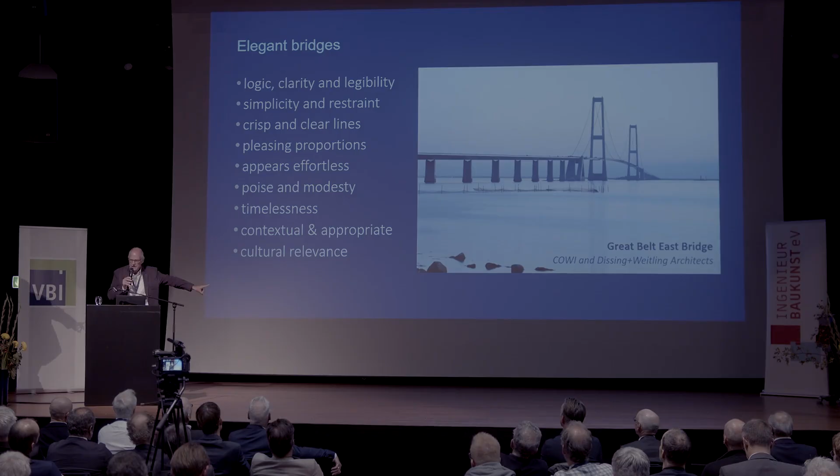Elegant bridges, they're supremely elegant - the Storebelt, Great Belt Eastern Bridge, a fantastic piece of work. These are things we need to keep in mind, but nobody teaches this in most engineering classes. I certainly find it difficult to find engineering schools doing it really well. I try when I teach.

Let me take you back 25 years. In the UK we had a number of Millennium Bridge competitions - this one, the famous one in London, got a reputation for things it didn't really want to have: the wobbly bridge, as you know, which spawned a whole raft of discussions about bridge dynamics, thankfully.

I got an interesting phone call from the chairman of Arup on the day they had to close it because it was wobbling, saying 'help, we need to sort out what was going wrong' - which was a very interesting 18 months of work to fix it.

Also probably equally famous, the Gateshead Millennium Bridge, the 'blinking eye' as it's called, by Gifford - as they were then, now Ramboll and Wilkinson Eyre architects. And perhaps less well known, the York Millennium Bridge. That's just three of them - there were 25 or so built within a few years.

And it was all triggered by this: the Bridge Design Seminar at the Royal Fine Arts Commission in the UK in 1992, which was itself triggered by this man. There was an exhibition in 1992 at the Royal Institute of British Architects in London of Santiago Calatrava's work, and there's no doubt he created a moment in history where we all opened our eyes to new possibilities.

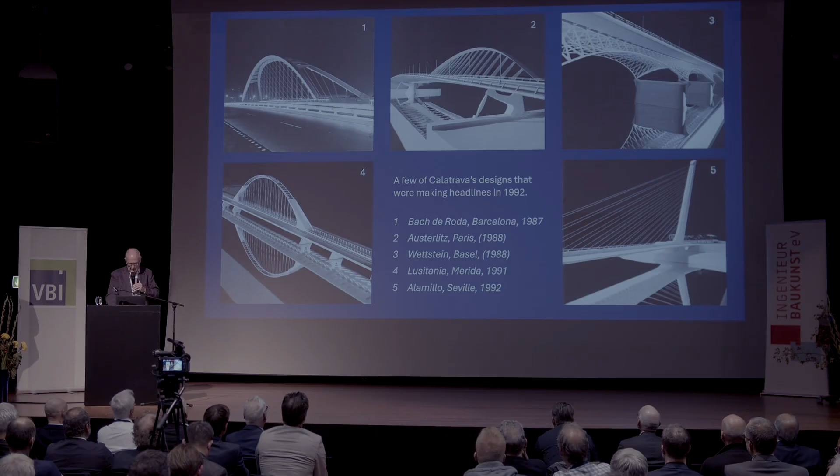At the seminar, Fritz Leonhardt was there, Christian Menn was there, Santiago Calatrava was there, and all the UK bridge designers, including myself for some reason. It was extraordinary to be sitting with these people, because the UK had terrible bridge design going on - nobody was giving the first thought to what bridges looked like, simply engineers building basic bridges.

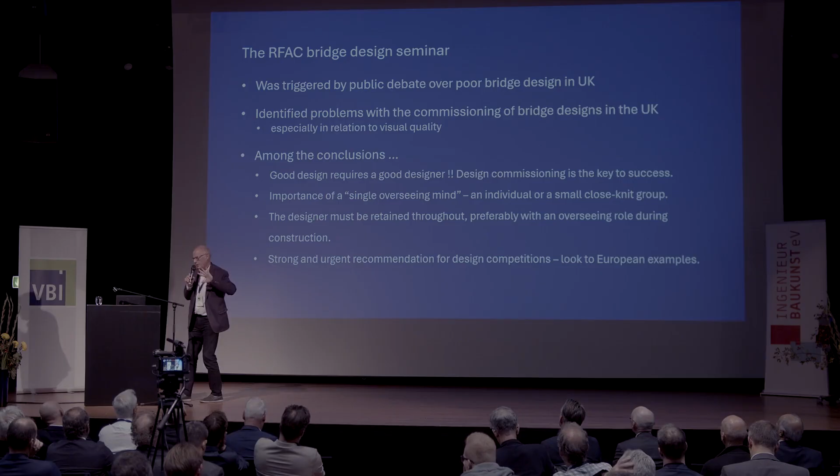There was no imagination going on, very little thought given to elegance and delight. This had become a public debate, a public issue, not just a profession issue. The debate in this seminar quickly focused on the problem of commissioning bridge design, because the way design was commissioned was basically on the lowest fee - fee competition became a thing mainly when Maggie Thatcher came along.

Among the conclusions was, obviously no surprise, good design requires a good designer. So how do you find a good designer? Well, the first thing you don't do is go for the lowest fee. The other conclusion was giving the designer a proper role in the process.

And this idea of a single overseeing mind - the idea that there is a designer, an individual, or a very small team. Because what had happened, and it's still happening sadly, is that design was being done almost by committee, large groups of people.

And the designer should be retained throughout, preferably overseeing construction. Does that still happen?

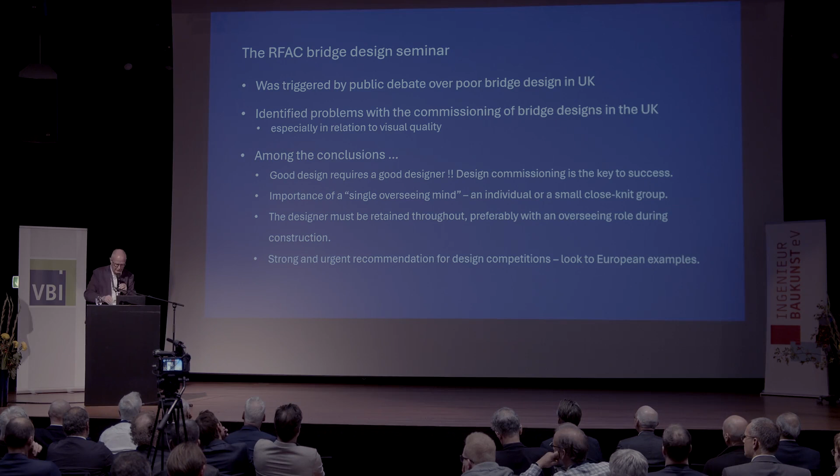There was a big push for competitions, and very quickly there was the Poole Harbour Bridge competition in 1994, which was really, okay, we happened to win it, but it was much more about raising the bar of expectation about what could be done with bridge design.

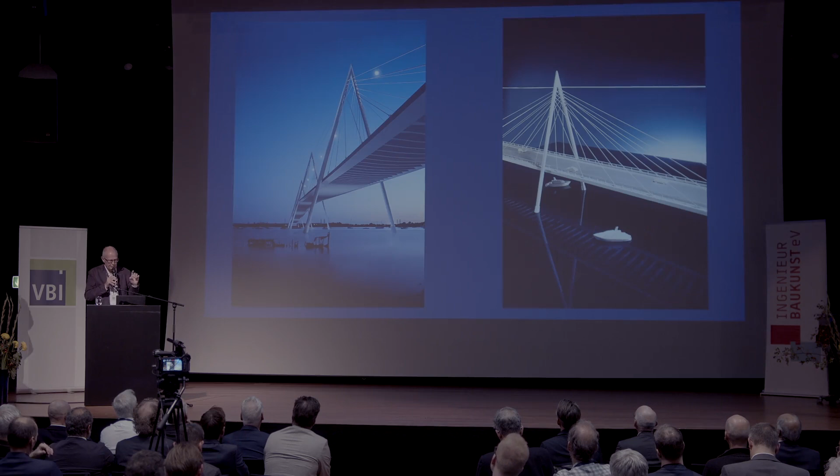Little by little we then had a whole raft of these, like the Poole competition, which was a quite unique kind of location because this is relatively shallow water, only small boats use this space, so you could do a bridge which didn't have to worry about heavy vessels bumping into the supports. This one unfortunately never got built for political reasons - the government changed, the Labour government came in and changed everything, cancelled just about every project in the country.

But the first one of mine that did get built, the first Millennium Bridge, was this little aluminium footbridge in Maidstone, which is in Kent, southeast of England, working with Wilkinson-Eyre architects.

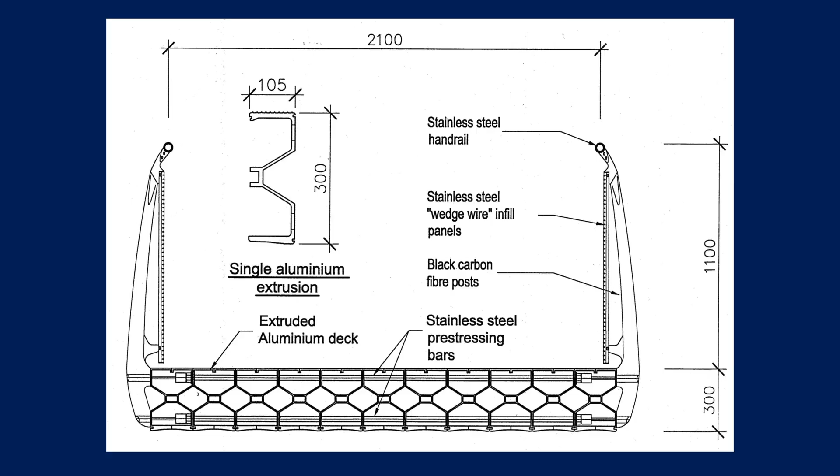This is an aluminium bridge deck formed from aluminium extrusions, a series of sort of epsilon-shaped extrusions, back to back, and it's on a curve, so it's like a laminated beam. Super lightweight, actually quite cheap - it was one of the lowest cost per square meter of all the Millennium Bridges. There it is.

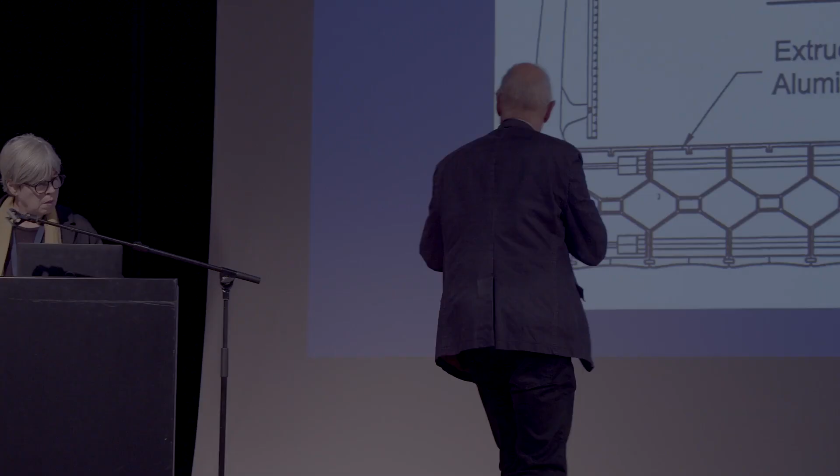So the pointer is that thing. Okay, good, thank you so much.

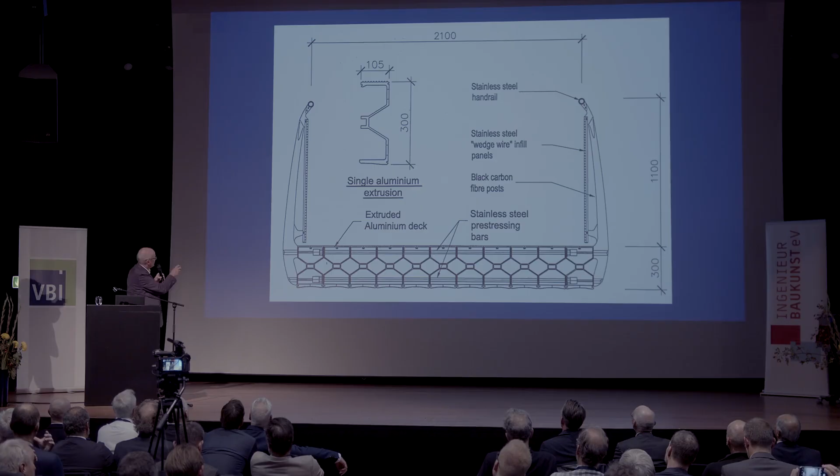So there's the epsilon shape. That was the biggest extrusion we could make. In fact, it was a Belgian extruder, I think, because of the size, maximum size of the die, and it produced these things, so you have a sort of cellular structure.

And there's nothing else to add. One of the reasons why this is very cheap is because that is the structure - there's no secondary structure, that's it.

And then we had carbon fiber parapet posts, all stressed together sideways. I like to think it's probably reasonably sustainable in that everything can be reused, although aluminium doesn't qualify very well on the carbon agenda.

And then there are a number of other little bridges, a strange little one I did here with Studio Bednarski - Cezary Bednarski, some of you will know him. And this one, which you've seen pictures of already, was also with Wilkinson-Eyre Architects.

It's obviously a torsion box with cable stays on one side. The curved plan form means that it's possible, by adjusting the angle of the mast and its position, to make sure that all the permanent loads are axial in the mast. Some of the stays are pulling it forwards, some are pulling it backwards, so at the bottom it's just axial forces.

I'm surprised how many engineers, student engineers at least, but even quite well-qualified engineers, still ask me how does it work. Many of you are quite happy to do a curved bridge supported on one edge because, of course, it works - you've got torsional stiffness, it's not a problem. I don't know why people don't understand it, but it's pretty straightforward. In this case it has a thrust bearing at the center, pulling it back against the mast, and then torsionally restrained ends.

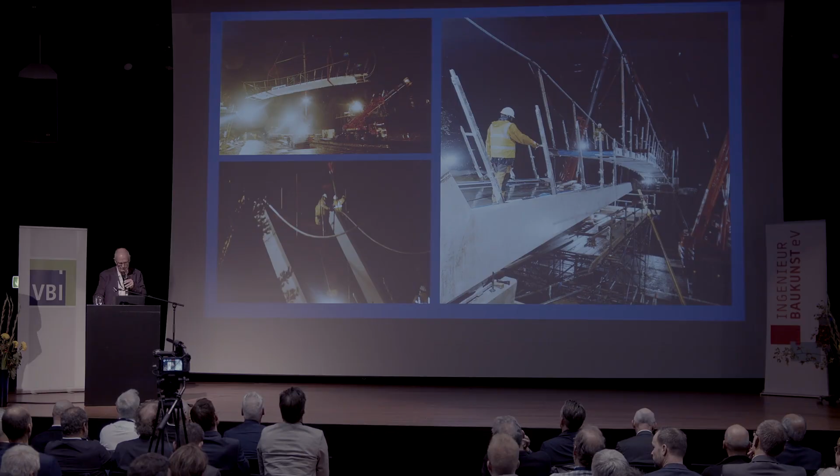And then the other little one, just to mention, is the Bridge of Aspiration in Covent Garden, which was mentioned in the introduction, between the Opera House and the Ballet School - the shortest bridge I've ever designed, rather fun. Another aluminium beam, actually - I've done it again, oh no, that's that one, put that thing down. I think probably the most joy I've had out of any bridge to design, just because it's such fun.

The idea of this, incidentally, was that the architect wanted to create a sense of movement. The brief was, from the ballet school, create a sense of movement and constrain the views from the people on the bridge down along the street, because the ballet school director had an apartment just to one side, and they didn't want people looking into his bedroom. So Jim Eyre, the architect, said, what if we take a square section, like a picture frame, and have several of them, and twist them incrementally through 90 degrees.

The problem is - and that's what we did, and it works - this is the views, if you would stand on the bridge, are indeed constrained along the road. The problem is that the bridge doesn't just go straight across; it goes on an incline, and it goes on a skew. And this was the days when geometry had to be worked out by hand, and it was challenging. Anyway, there we go. And of course, Stonecutters Bridge, you know about.

We won that competition and then lost it again. But of course, the trouble about competitions is that they also rely on having a jury that is competent enough to recognize something which is buildable and something which is not. And it sometimes goes wrong.

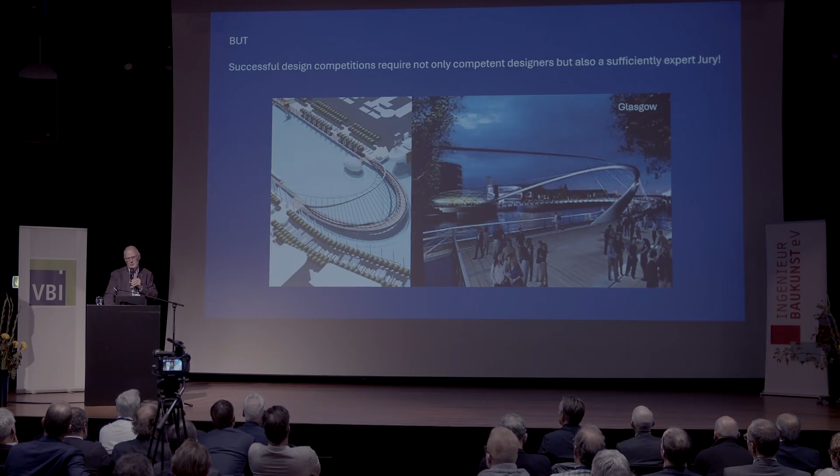So this was Glasgow - I won't mention who the designers were - but a bridge that I think the client ended up... this was awarded as the winner of this particular competition, and clearly was never going to work. I don't remember how many millions were spent trying to make it work before they abandoned the project. The same thing happened here.

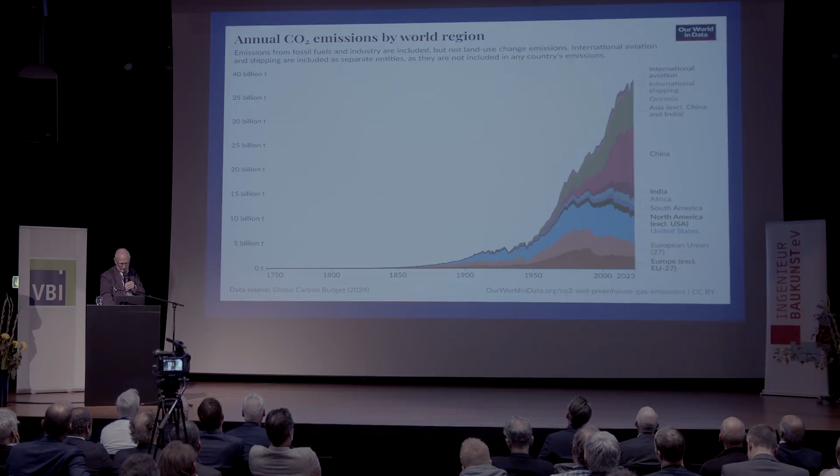So what we now need to do is focus on carbon. You've all seen these sort of pictures before where carbon is going through the roof, and we're never going to make it down to zero in 2050, we know that.

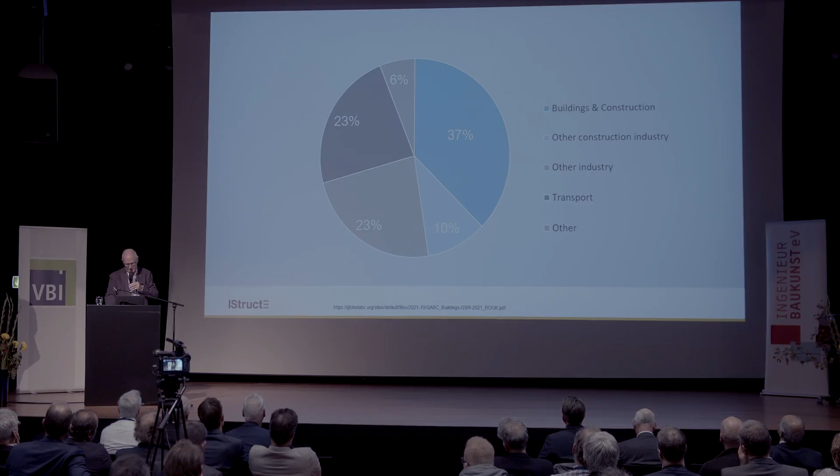The question is, what are we going to do? Whatever the number is, 37%, 40%, whatever it is, it's our fault. But we're also in control of the solution.

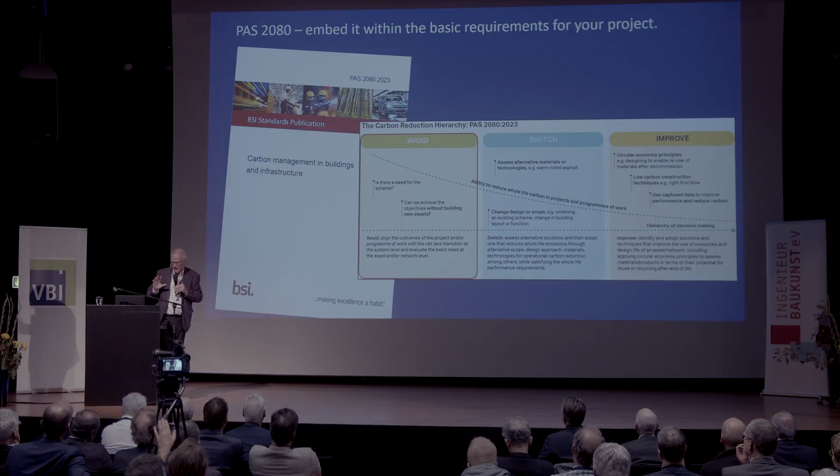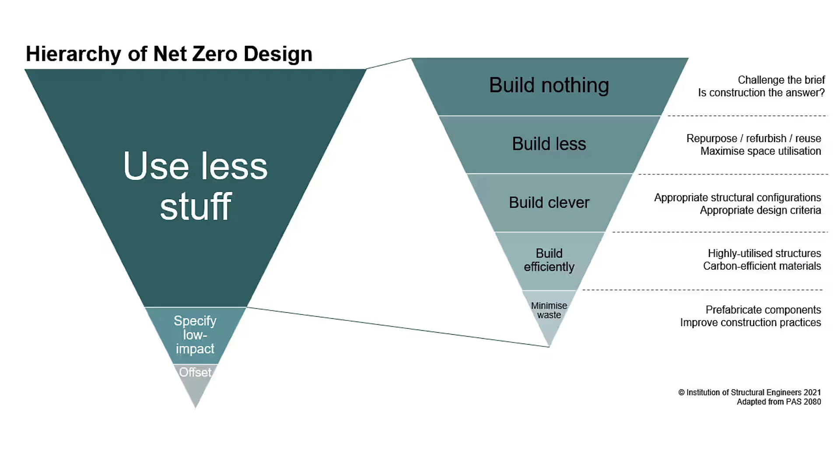This document, PAS 2080, is something we use now pretty well universally in the UK - carbon management in buildings and infrastructure. I recommend it if you haven't got it, or you've probably got something similar. We've all seen these kinds of pictures before: build nothing, build less, build clever, etc.

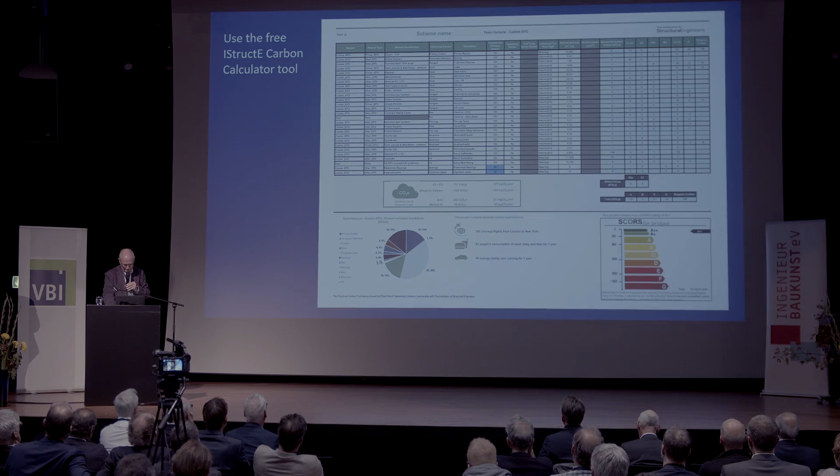The Net Zero Bridges Group in the UK is also another panel worth looking at, because they are really looking at options and how we really change the situation about how we do things. The resources from the Institution of Structural Engineers I could also recommend, which include a tool for example of how you calculate carbon.

You've probably all got your own, and we do it on every single project. This is a slide borrowed from COWI, where they look at the sort of average they have had, sitting at about D - around 2,000 kilograms per square meter on your bridge structure. This is a 2030 target, and by 2050 we've got to get down to somewhere much lower.

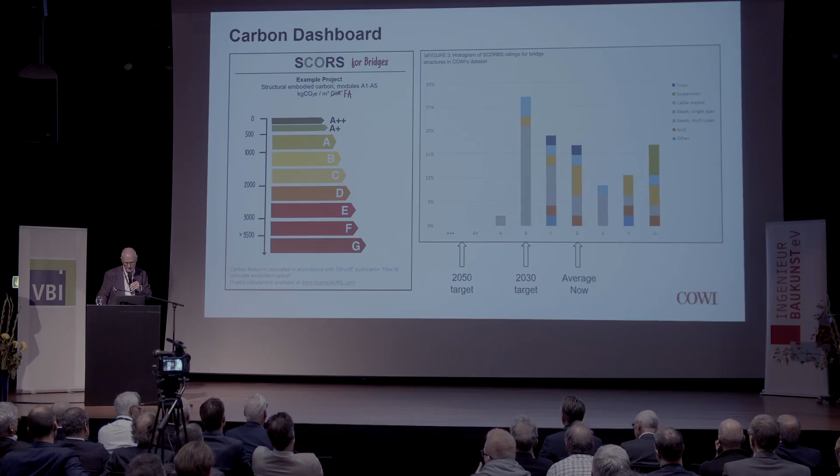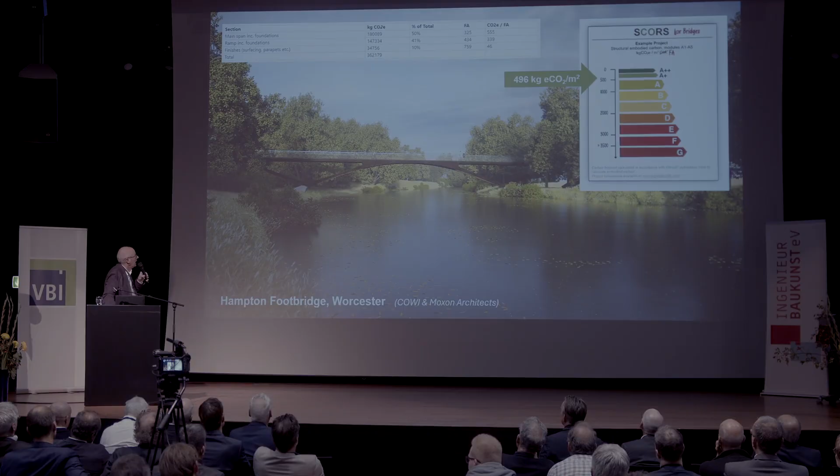This is a typical bridge, one that COWI did recently with Moxon Architects, shown up there. For less than 500, you're doing pretty well. These are the targets that we all need to be aiming for.

Clearly, we need to think carefully about what we're doing. We must ask ourselves, do we really need to be building this stuff? Ask our client what we're doing. I'm going to go more quickly here because I've got something I wanted to say.

One of the things we need to recognize is that we're constantly over-designing. This is from the Golden Gate Bridge anniversary - that's a big crowd, and somebody worked out it's 2.87 kilonewtons per square meter. Well, we're designing for 5, sometimes 4, and then we put a big factor on it.

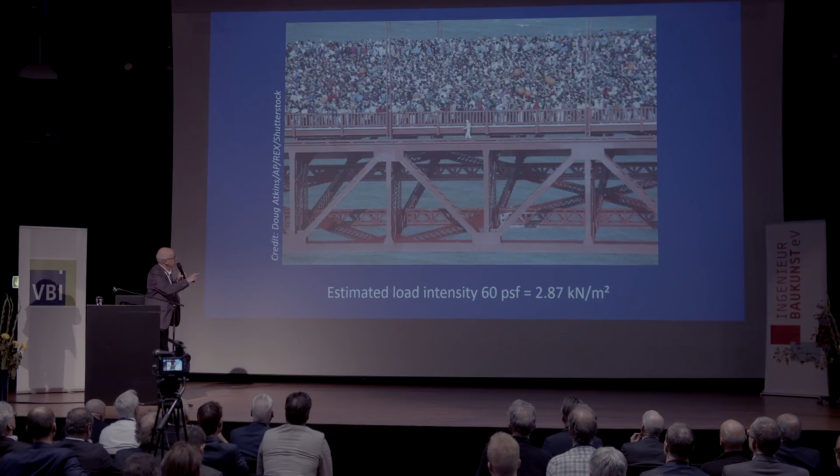So we're over-designing. I love this picture - I'm just interested to know who the figure is in white. What was he doing? Anyway, I'm going to pass on for that one.

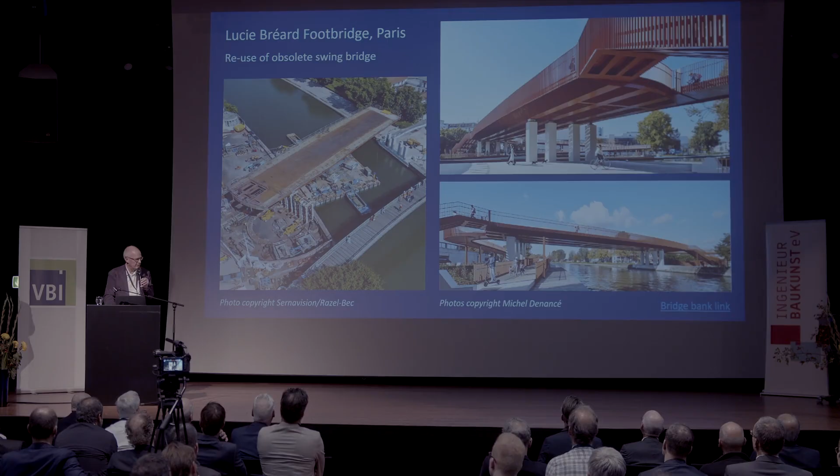This is a project in Paris, which some of you know about, repurposing an old obsolete swing bridge as a footbridge as part of the Olympics. This has got to be the kind of way we want to use to make the best of the old materials we've got. I haven't got time to show it to you now, but do look this up if you haven't come across it yet.

The bridge bank in Holland - you can just get hold of a bridge which is available. It's old, used, available - let's reuse it. If you haven't looked at it, I recommend looking at this website. Just Google Dutch Bridge Bank and you'll find it.

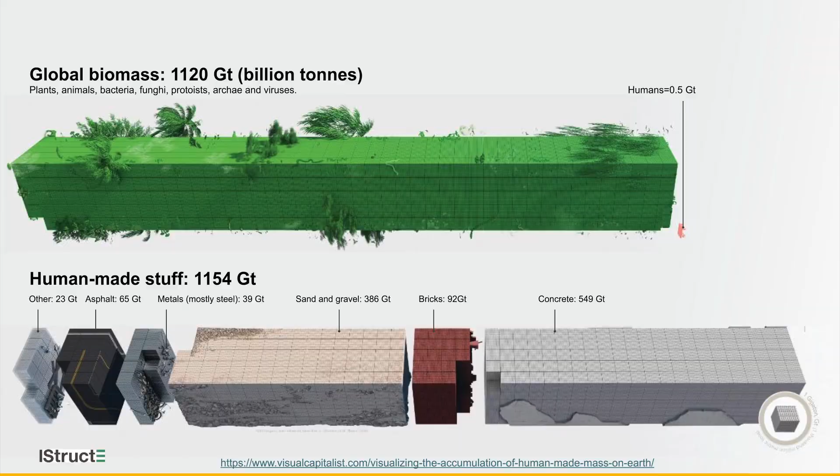Did you know that the amount of man-made stuff on this planet is more than all global biomass put together? I only learnt that very recently, and it's astonishing - the amount of stuff that we make and use and waste is more than all the trees and plants and fungi and everything else on the planet. That terrifies me.

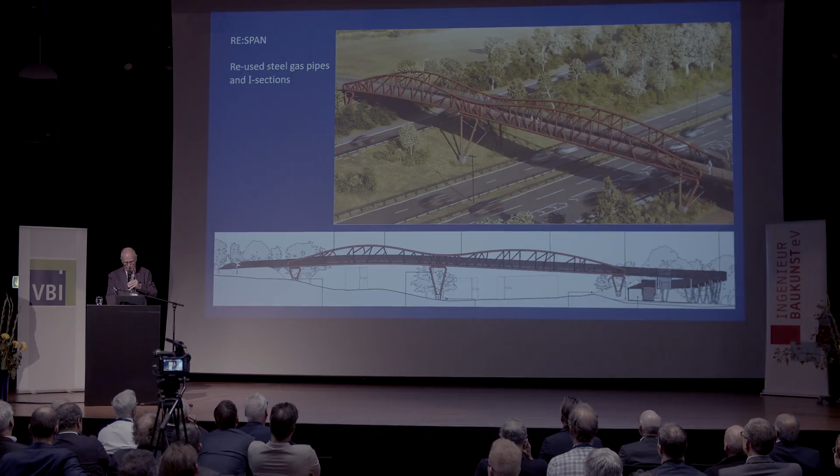I'm going to click through this because it's actually not the point I wanted to make. So this is about a low-carbon footbridge competition we ran in the UK. There's a slide at the end I just want to show you with the figures - this was a footbridge about 70 meters long, and this was the carbon at the end of phase 1 of the competition, so not quite fully developed.

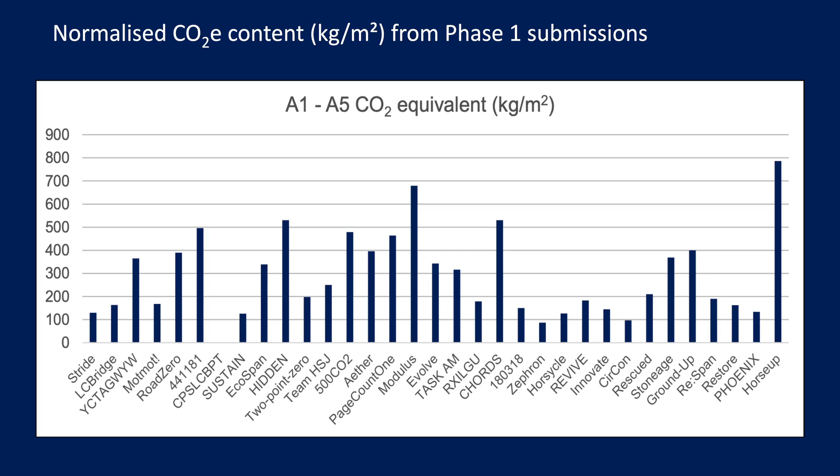But you can see that the lowest ones are right down here at about 100 kg per square meter. That's seriously low.

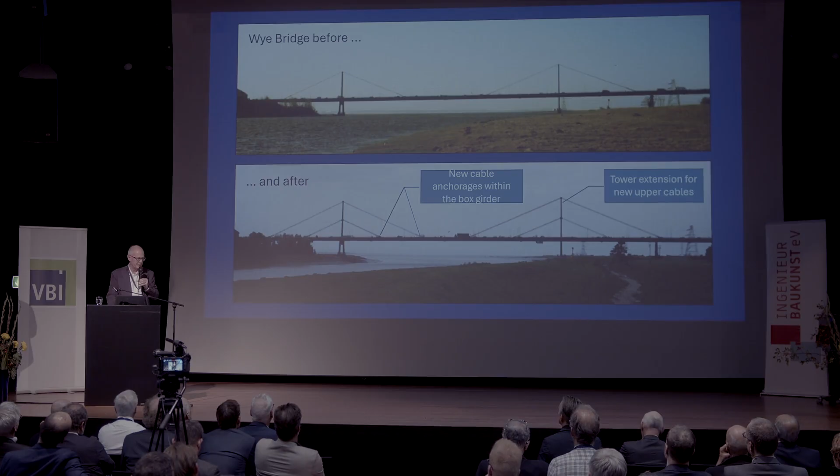Anything down that level is pretty impressive. Just something on the old structures - I started my career looking after an old bridge, a famous 1960s built bridge, strengthening and changing the cable system on the Wye Bridge. This emphasized for me the importance of keeping old structures alive. This was done entirely with traffic running on the bridge. I'm nowadays looking after, and have been looking after, structures like these, which are in desperate need of support and help and new leases of life.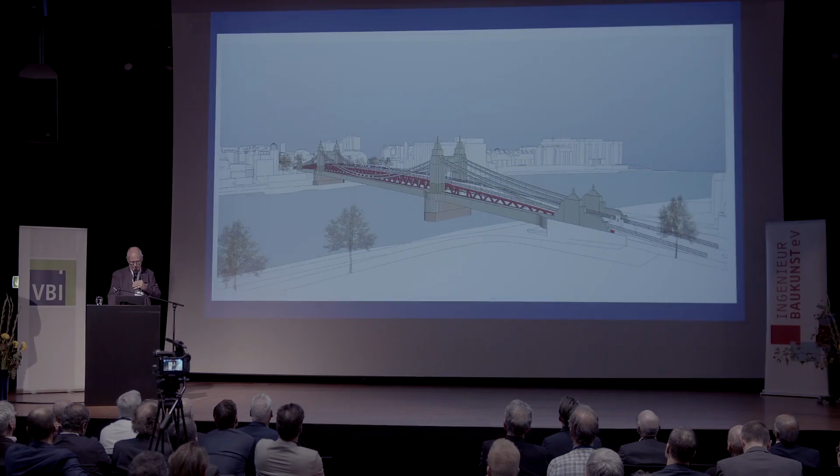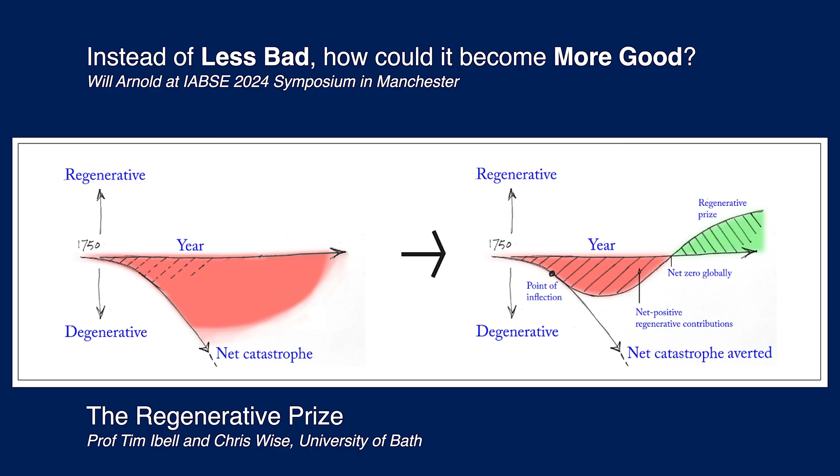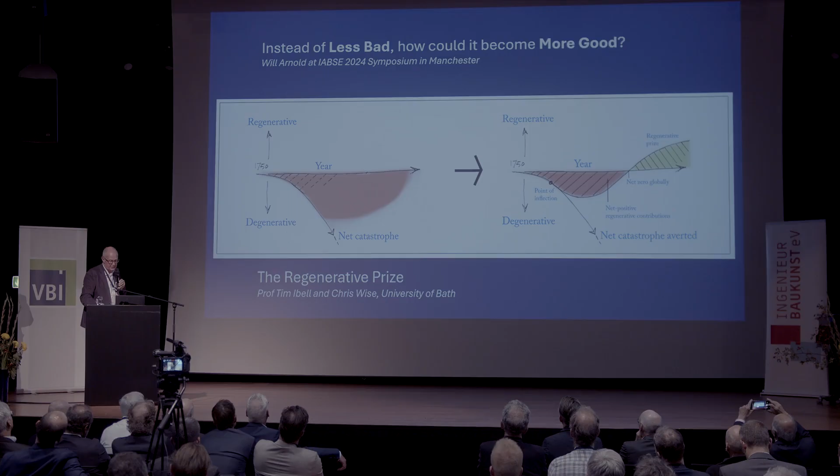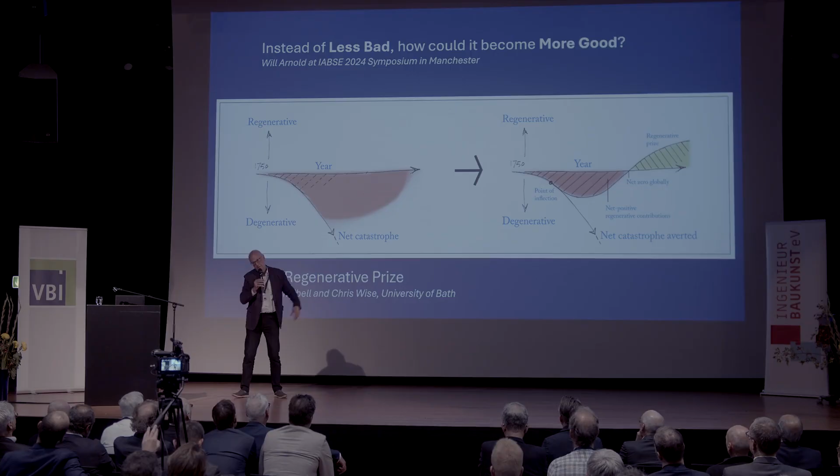I'm going to finish with one slide. We are talking a lot about getting to net zero, but that's not good enough, is it? So we have to talk about regeneration. I borrowed this slide from Chris Wise, so I don't take credit for it. Basically, we have this situation where we are, even now, degenerative - we're heading down a catastrophe slope. Now, we can curve it back. We're working on it. We can get back to some kind of a zero position, but we've got to start rebuilding, build into a regenerative situation. And this goes way beyond structure, into the whole environment around what we build.

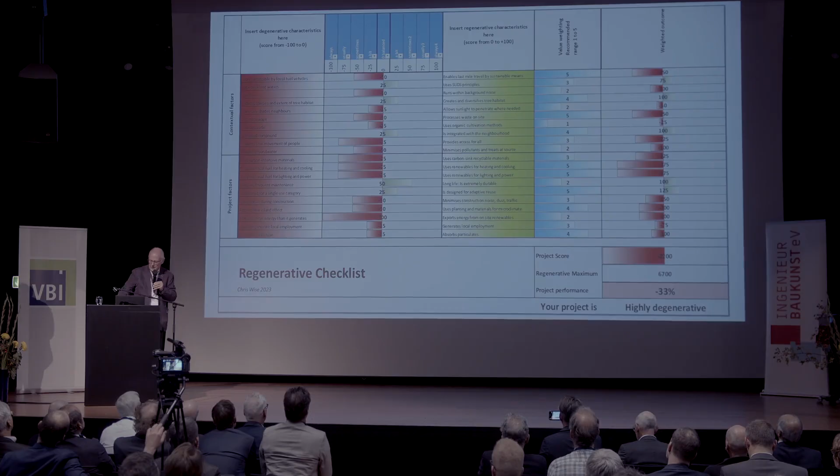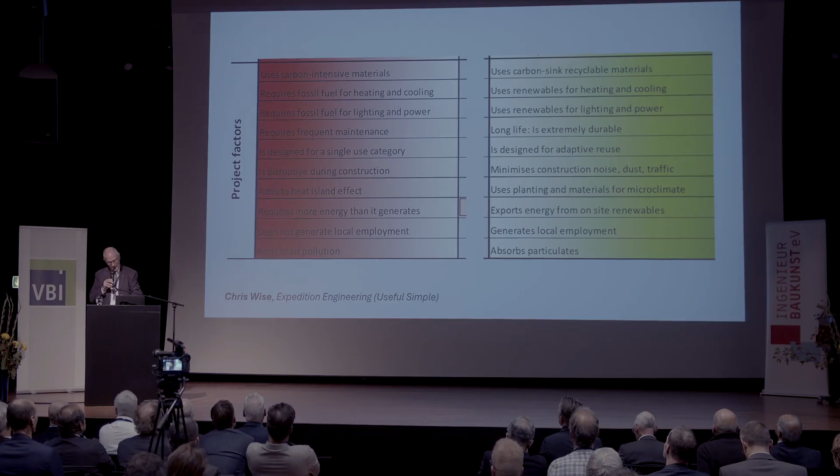If only I had time to talk you through this checklist he's got, I could highly recommend it to you, where you catalogue things like carbon-intensive materials, are they good or bad, fossil fuel for heating and cooling, all these sorts of things. You grade it to get to a figure at the end to tell you whether your project is regenerative or degenerative. If anybody's interested, please come and see me afterwards, because I'm sure Chris, the author of this, would be very happy to talk to you about it.

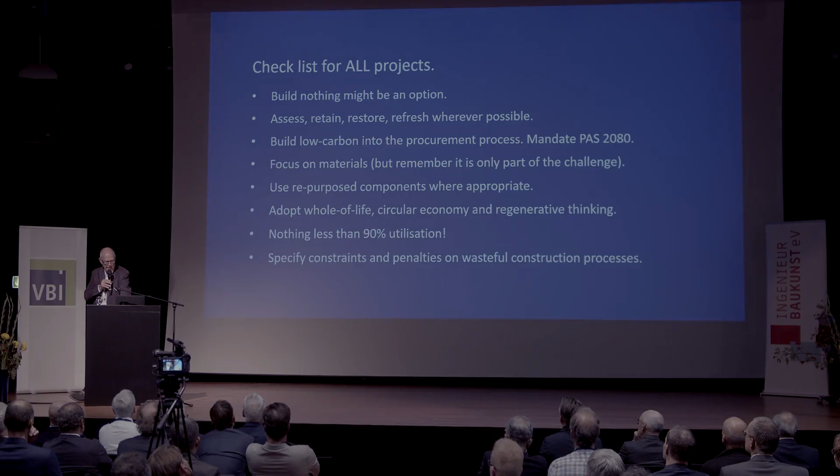So build nothing, if possible, but for goodness sake, please think hard about carbon and all the rest of it, and please make it beautiful. Thank you.